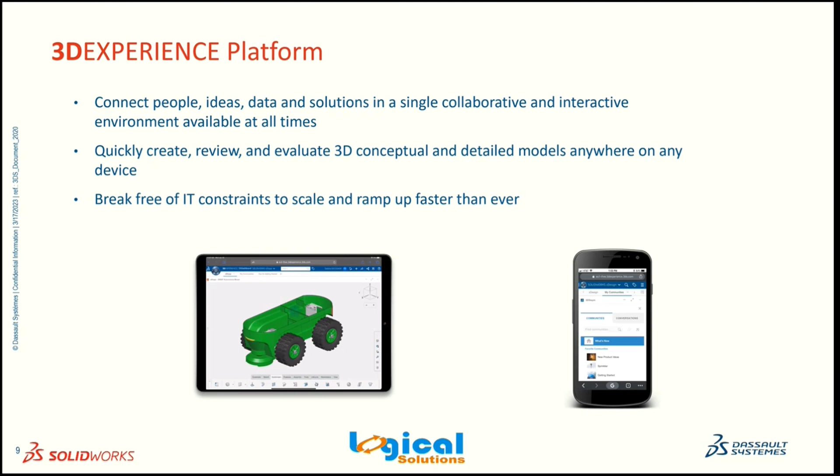Here we are coming with an exciting product, 3D Experience, where we can meet all our requirements within a single platform. People can connect, share their ideas and data, and get solutions within a browser-based platform, and also create 3D models anywhere and review and approve them anytime within the browser, without any other applications installed in your system. Have you ever thought that a simple browser can create 3D models without applications installed in your system?

Okay, let us see how our 3D Experience platform appears and behaves. This is our 3D Experience platform home page. You can see there is a login with the name Vignesh, and we generally call this the compass, where I have placed my cursor.

You can also see there are different roles in this compass, like 3D Creator, 3D Mold Creator, 3D Motion Creator, etc., and there will be apps within these roles. For instance, there is the XDesign app in the 3D Creator role, and the Sheet Metal app in the 3D Sheet Metal Creator role. In the same way, there are many apps across many roles.

We can also create a particular dashboard for our own convenience, for individual purposes or for team discussions, and we can manage the dashboards. Let us create a new dashboard.

I'm entering the dashboard name as 123. Now you can see a new dashboard with the name 123 has been created. Let me drag my apps into that dashboard. You can also see on the top, 3D Experience dashboard, 3D Dashboard 123.

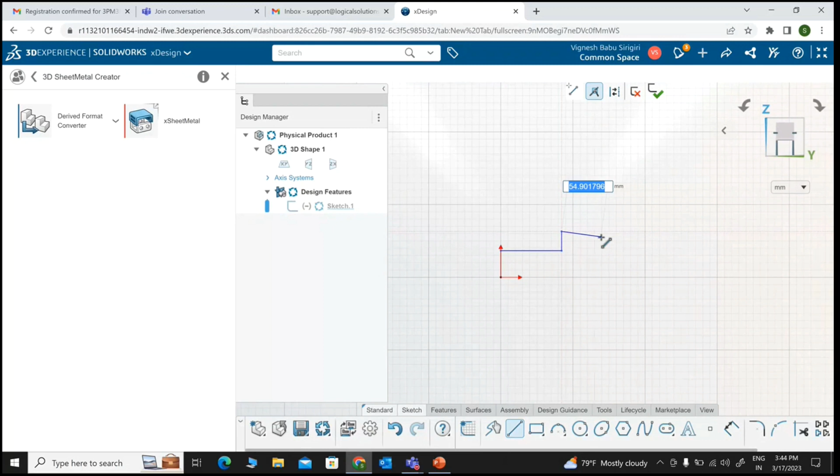Here you can see all the commands. I'm going with the sketch tab and selecting a line here. I'm simply drawing a rough sketch. We can also predefine the dimensions of the sketch, or else you can define that afterwards. Simply I'm drawing a rough sketch, and later on we'll give the dimensions and relations to fully define that sketch.

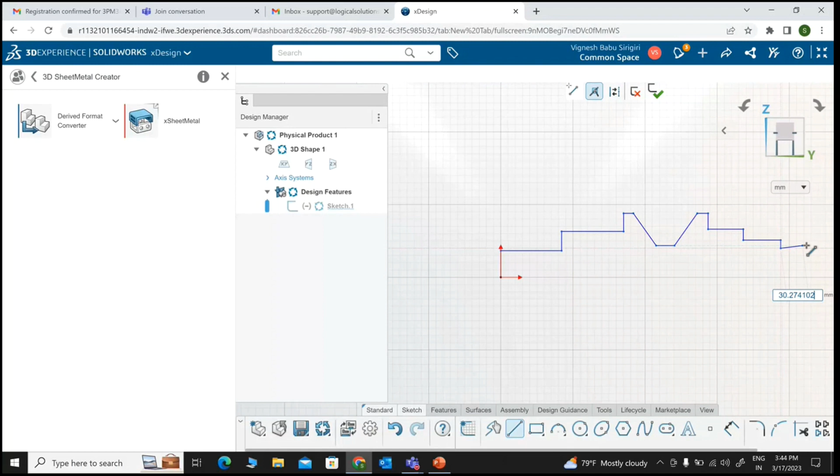Now let me give the dimensions and relations to fully define this one. I will simply give the coincident relation by clicking these two points. This is my first point, and by pressing Control, I am selecting the second point. You can see the relations here, whether it can be horizontal, vertical or coincident. Let me give the coincident relation here, and you can see this line has been constrained, turning from blue color to black color. Whereas in SolidWorks, this is said to be changing the status of the sketch from underdefined to fully defined.

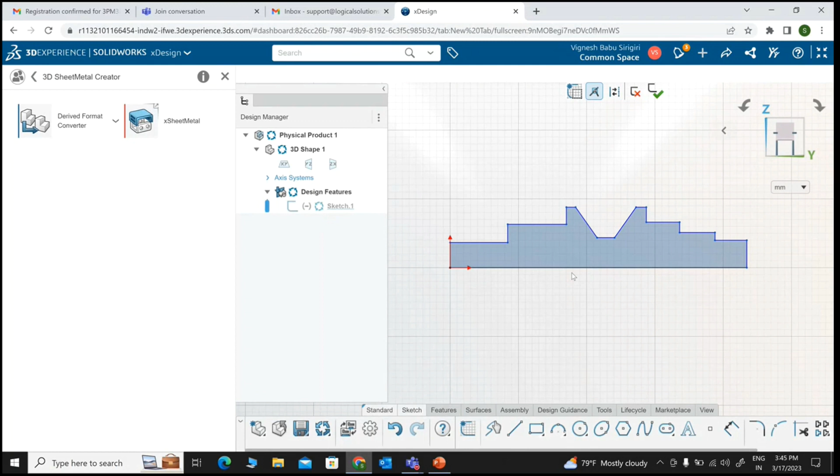So let me make this line as a construction line. And I'll go with the dimensions here, and you can see there is a dimensions command here, sketch dimensions. Let me give the dimensions here. I'll give this line as 60.

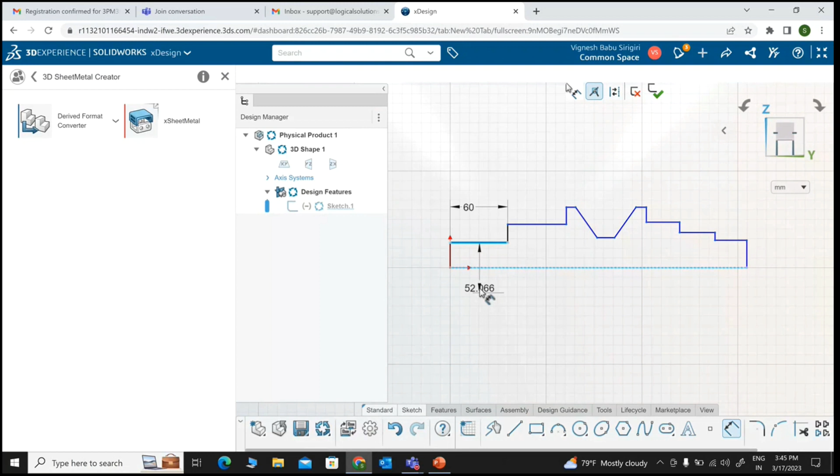Let me define these with the special dimension technique as we do it in SolidWorks: selecting the center line and the line where we are giving the dimension and simply moving the cursor here. This is the special dimension technique we follow in SolidWorks. Let me define this as 40, and this one as 70.

We can also give the relations. You can see I have given this dimension as 15, and I'm selecting this line and this line, and I'm simply giving the relation as equal. Now I'm going to draw a line and make it a construction line, and I'll simply use the symmetric relation between this line and this one with the center line.

I'll go with smart dimension again. Let me give this dimension as 15. From this end point to this point, let me give the dimension as 120. Using the special dimension technique, I will be giving this diameter as 125. In the same way with this point also, with this line also.

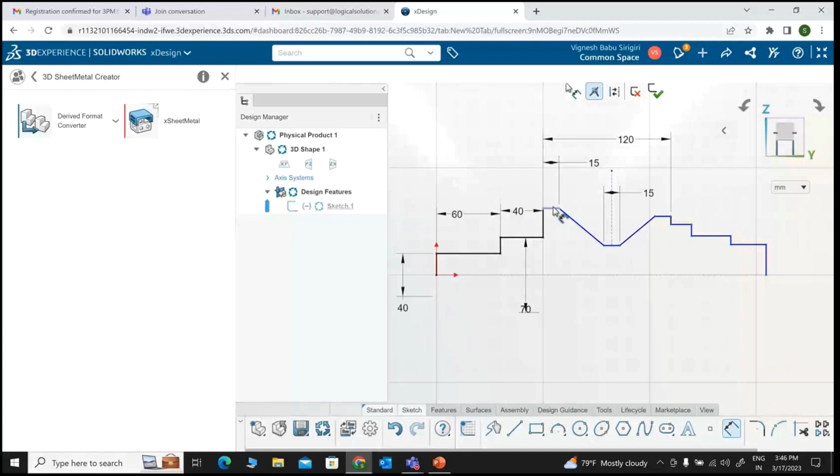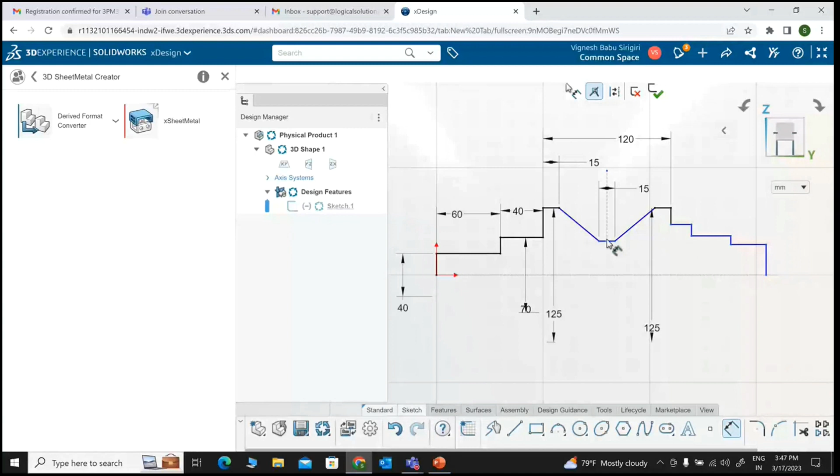Let us give this dimension line as 60 and this thing as 70. I'm simply fully defining the sketch as like we do in SolidWorks.

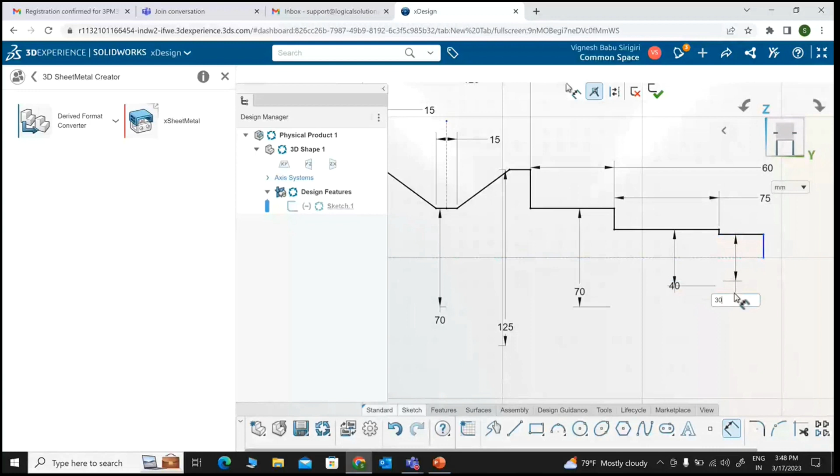This is my last dimension to fully define the sketch. Let me give this as 30, and now I'm going to revolve this one.

I'll go with features. Here we'll be having different features, whether it can be extrude or revolve or sweep or loft, everything. And now I'll go with revolve.

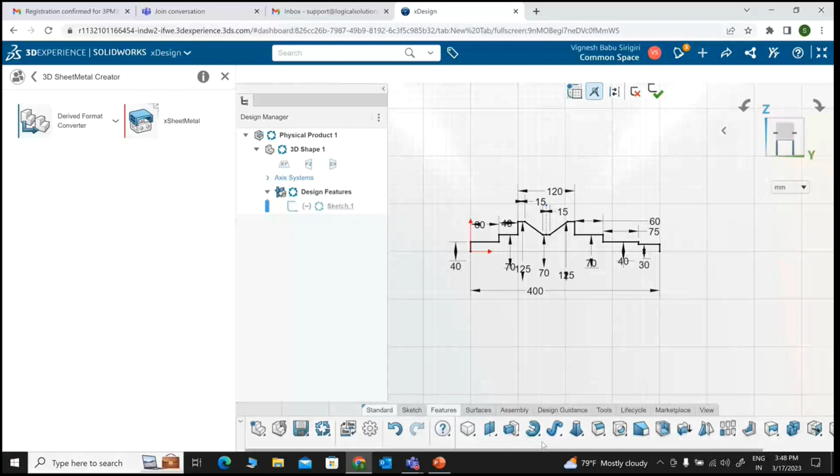A dialog box has appeared here, and it was asking to select whether it can be a solid or a thin feature. The profile of the sketch has already been selected by default.

It was asking to select the revolution axis. Let me select this construction line I made as my axis of revolution, and you can also see the preview there. I'll click on OK.

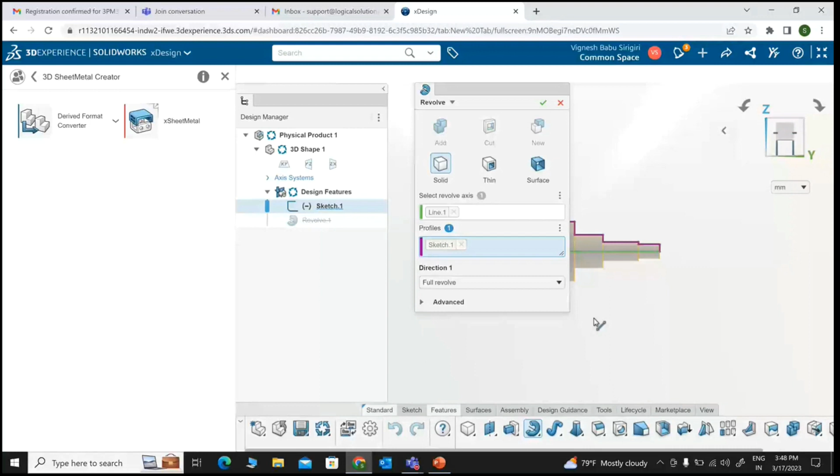You can see my model has been created, and you can also use the shortcut keys Control 1 to Control 7. Control 1 is front view, Control 2 is back view, Control 3 is left view, Control 4 is right view, Control 5 is top view, Control 6 is bottom view, and Control 7 is isometric view. In this way, without any third-party applications installed in your system, within the browser we can create 3D solid models.

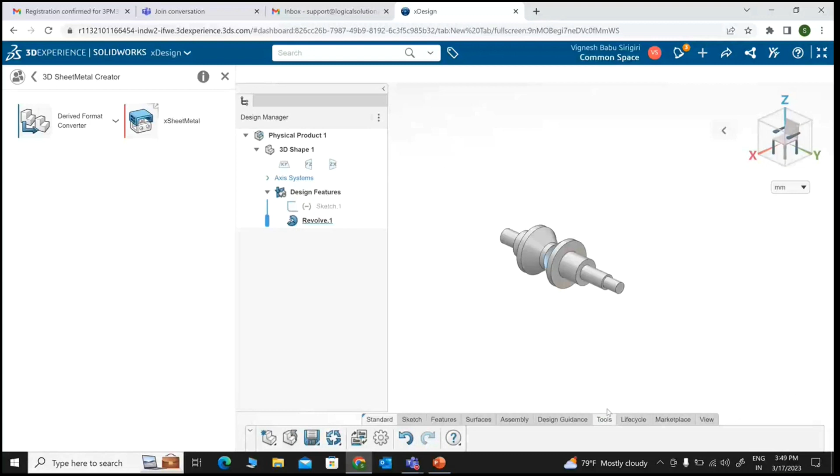We can also change the appearance of these things. In the tools we can see change appearance. It was asking to select the selection type. Let me select the complete set, and I'll select this as the 3D model, and select this red color, apply and continue.

You can see the preview, and the red color has been applied to this model. In this way we can create 3D solid models in the browser-based solution itself.

We can also measure the mass properties here, and we can also measure the distances from here. As in the evaluate tab, we can do everything what we can do in SolidWorks.

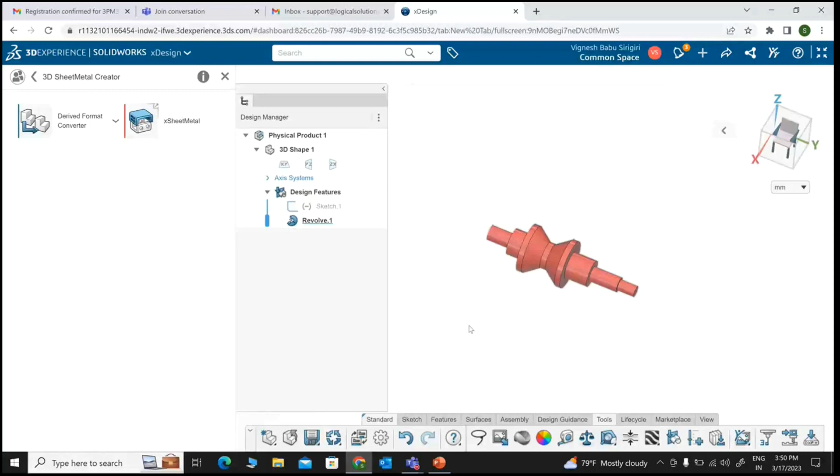Let us see one more application in our agenda, which is X Sheet Metal. The 3D sheet metal creator provides a focused user experience tailored to the needs of sheet metal designers and engineers who need to design sheet metal components and enclosures. We can create accurate and detailed sheet metal designs that are ready for manufacturing anywhere, anytime, with no installation necessary.

We can also validate designs early on, with instant access to automatically updated flat patterns. Along with this, the 3D sheet metal creator streamlines the design process with an intuitive, intelligent and dedicated sheet metal user experience, and also automates repetitive tasks with the help of design assistants using machine learning technology.

Let us see in brief the 3D sheet metal creator on the 3D experience. You can see here, as like the X Design app, the X Sheet Metal app has been fixed here in this dashboard.

In the same way, here also we'll be having how to create a new component, how we can open an existing component, and everything.

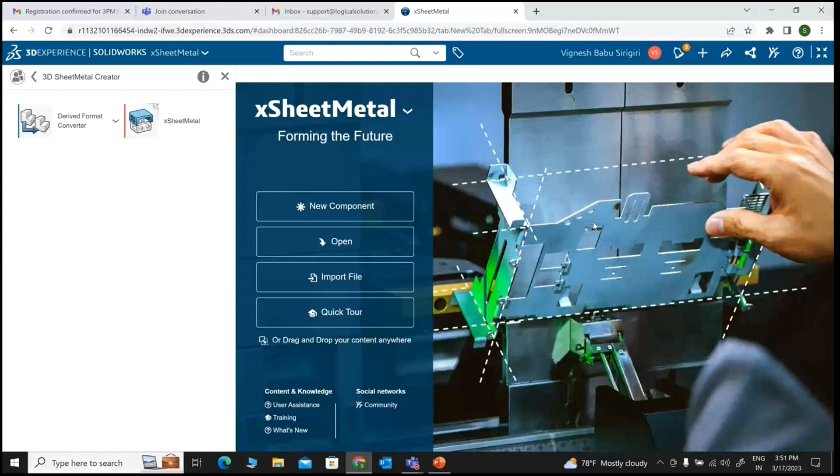Let me go with the new component and let us create a small design here. As in SolidWorks, we will be having 3 planes here: XY plane, YZ plane and ZX plane. To hide these planes, you can simply click on this and click hide. Let me hide all 3 planes.

Let me draw a sketch on this XY plane. I'll simply click on that XY plane and click on sketch. You can see it has become normal to my screen.

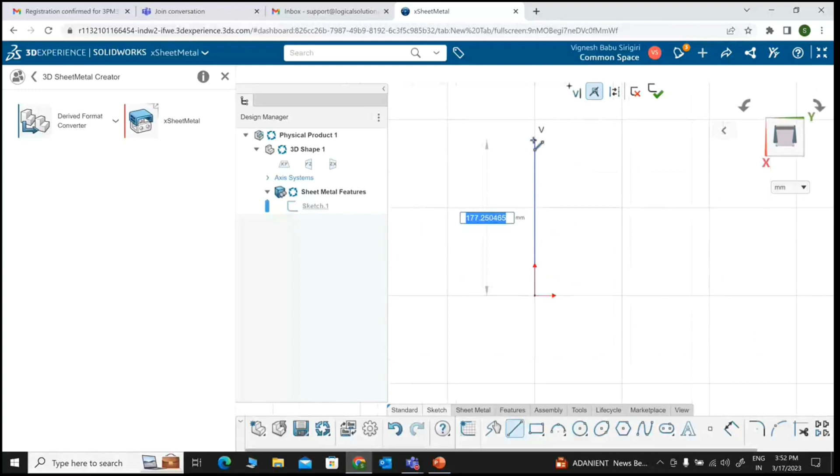Let me select a line and draw my sketch for this sheet metal. As you know, in SolidWorks, while operating with the line, if we place the cursor on the starting point of that line, it will be turned into an arc. In the same way, we can see here also. The line has been turned into an arc.

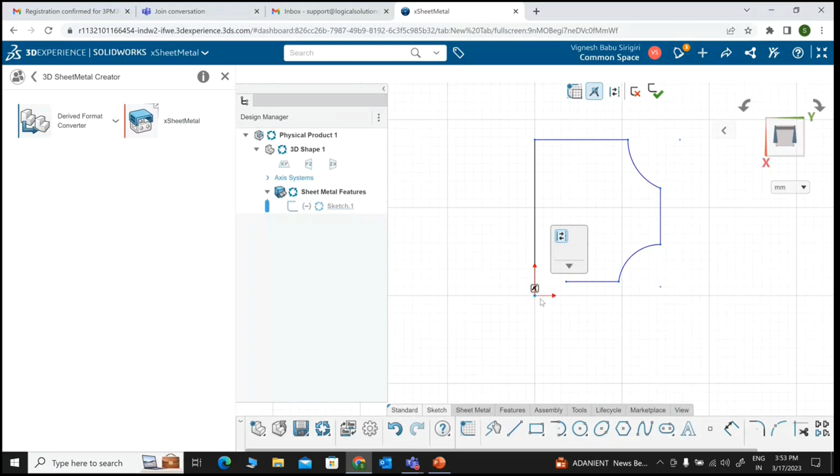Using the dimensions and relations, let me fully define the sketch. Coincident. And using these dimensions, from this point to this point, let us give this as 70. Let me give this as 105.

This as 50. This as 40.

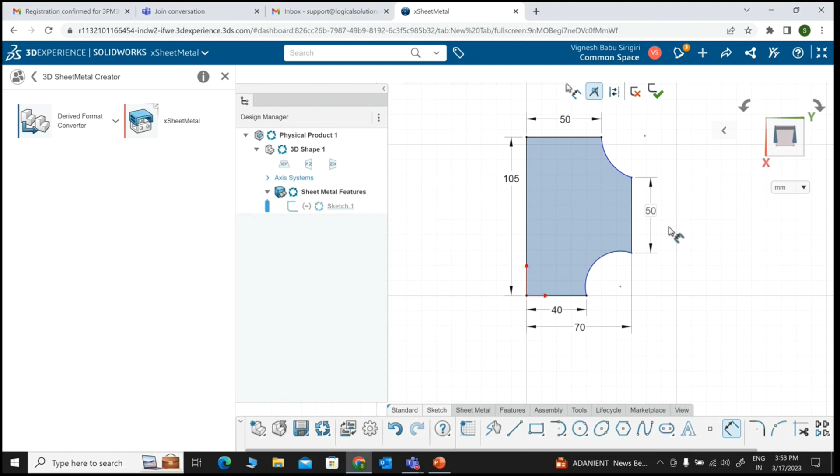Let me give the radius of these 2 arcs. Let me give this one as 25 and this one as 37.5. And also fully define this one. You can see here this has been fully defined.

We can also give the sketch fillets here using the sketch fillet option. You can see there is a sketch fillet option, and we can select here, simply select here, and let me give the dimension as 5 mm. Sketch fillet is applied here and here and here.

You can see the sketch has been fully defined, and the sketch fillets have also been applied here. You can see the extra sheet metal tab in this. Simply click on the sheet metal. You can see here, as like base flange, we will be having an option called wall. Let me click on this wall.

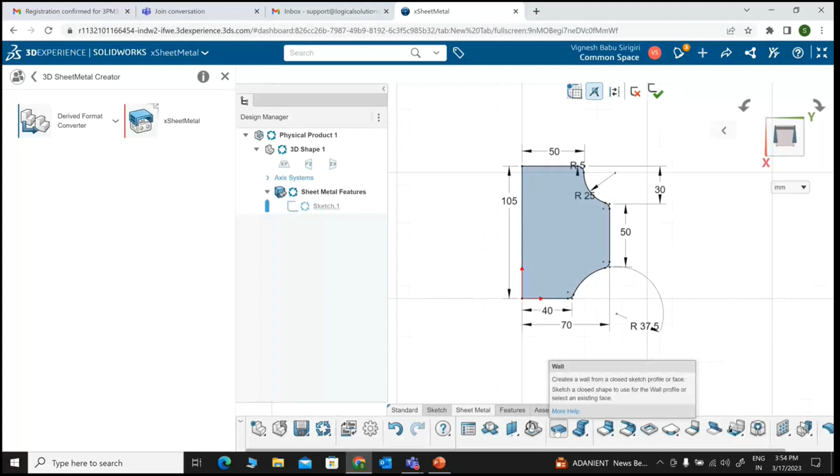You can see here the sheet metal parameters, how much the thickness should be and how much the bend radius should be. I'm going with the default one. And you can see here the profile has been automatically selected, and it was asking for an option offset and everything. I'll go with OK.

I'll click on Control 7. You can see here the base flange, or else the wall, has been applied for this given sketch.

As like in SolidWorks, if you want to know about a command, you can simply place the cursor on that command so that a small preview of that command will appear there.

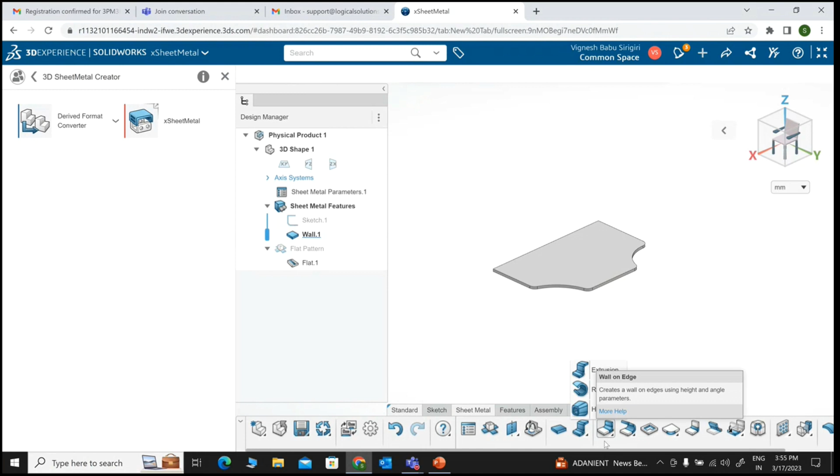Let us go with this edge flange, that is wall on edge. I'll simply click on wall on edge.

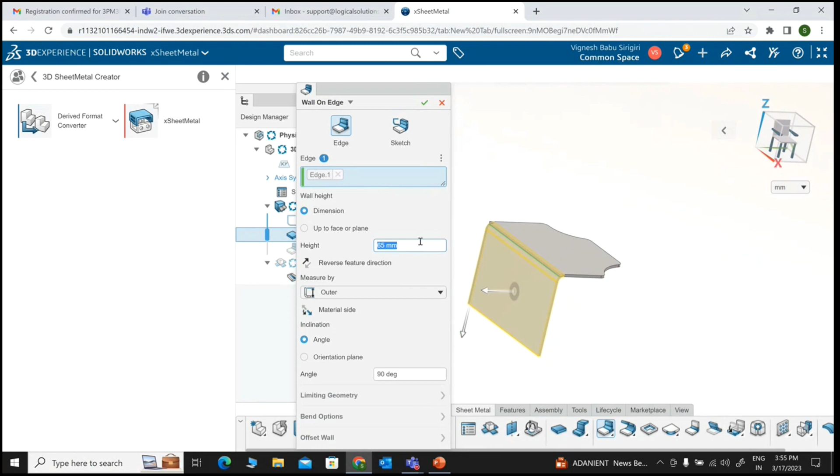Let me select the edge here, going with this edge. The material has been applied in the downward direction and the height is also given as 100 mm. Let me change this to 65 or 70 and reverse the direction here and click on OK. You can see here the edge flange has been formed here.

And in the same way, let us go with the miter flange. I'll simply click on this face and draw a sketch on this face, and I'll go with the line.

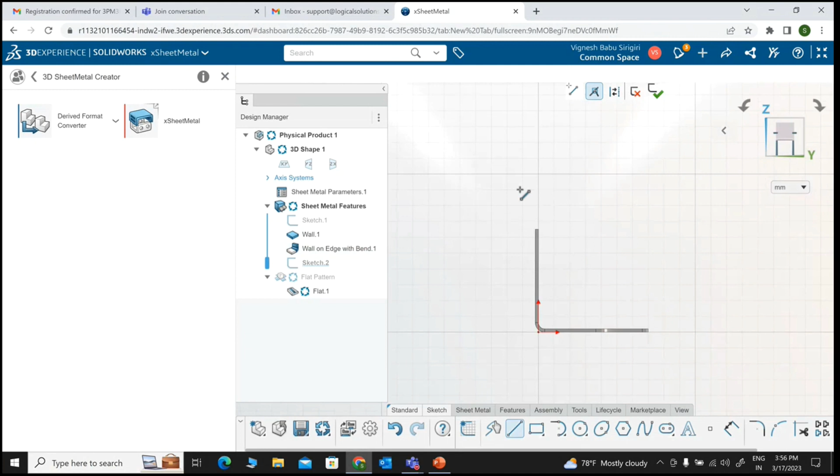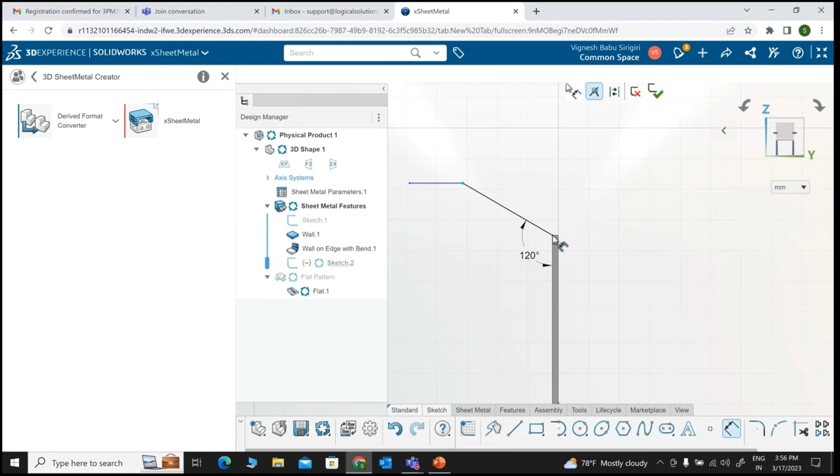Let me fully define this one also, the dimensions. Let me give the angle as 120, and the distance between this point and this point is around 40. Give this distance as 50.

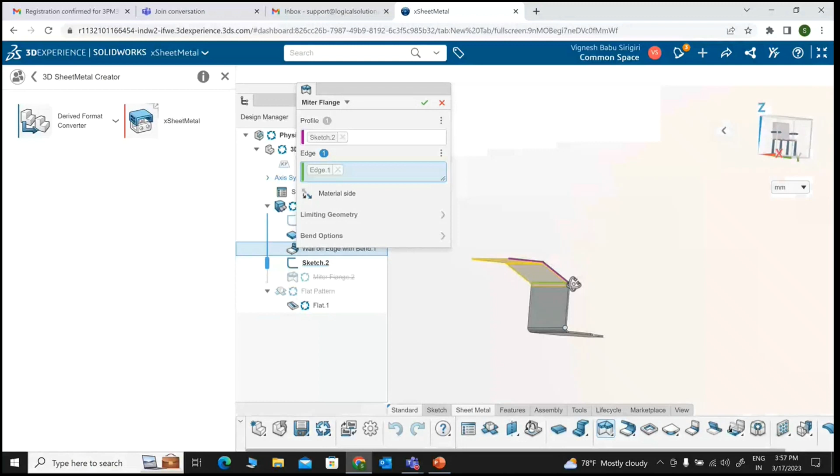I'll move on to the sheet metal tab, and I'll go with this miter flange, and I'll simply select this profile. The edge has been automatically selected, and you can see here the miter flange has been formed.

Also, we can use the flat pattern here to flatten the sheet. You can see here the option switch to flat pattern. After clicking on switch to flat pattern, it has automatically shifted to flat pattern.

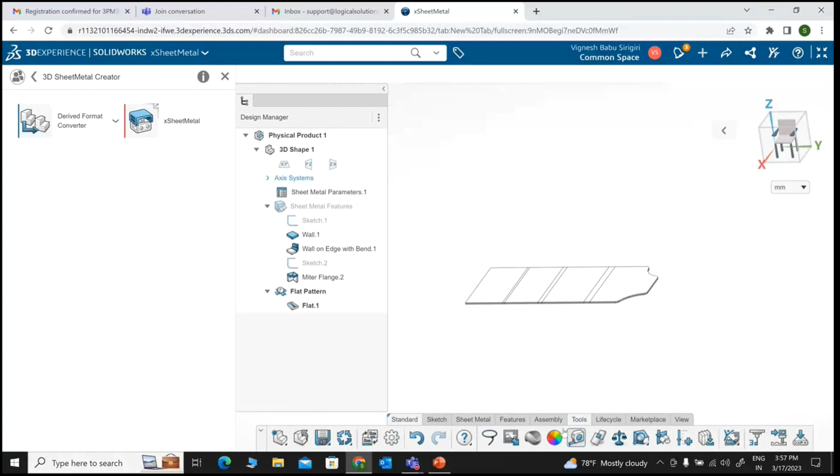We can also measure the distance using the tools. Here we'll be having the tools tab, and we can see how to measure. By clicking on the measure, a dialog box appears, and I'm selecting faces from one edge to another, from one face to another face. You can see here the distance is around 227.907 mm.

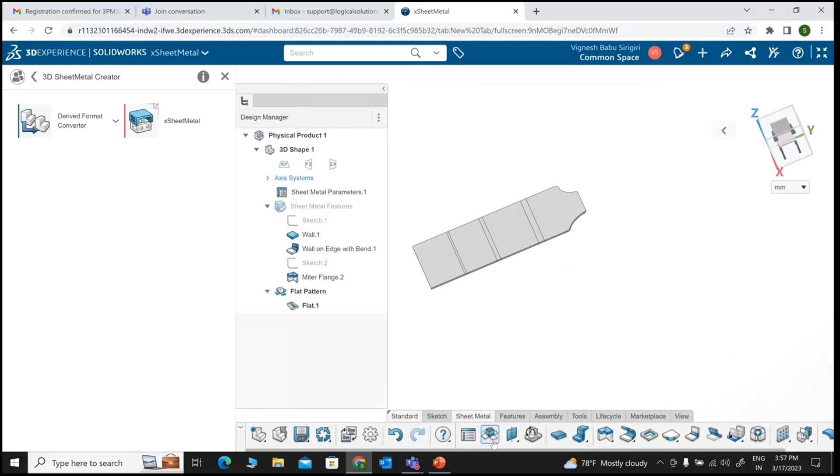In this way we can also go with these flat patterns. And if you want to unfold the sheet or fold the sheet, go with the sheet metal tab and click on this flatten tab, and it will come to the automatic state.

We can also use the keyboard shortcuts Control 1 to 7, as like in the XDesign app. And we can also use the rollback bar here.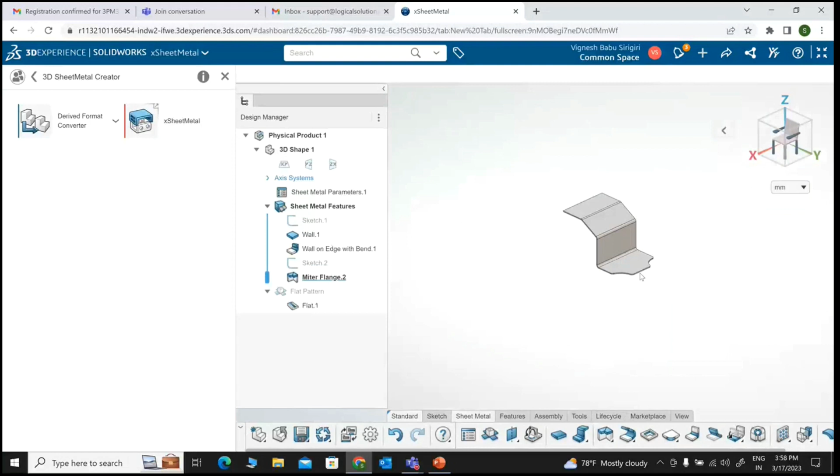If you want to verify the part in a step-by-step procedure, we can also verify in this way using this rollback bar. Simply click on this and drag downwards, and you can see a step-by-step procedure, reviewing the part. This is all about X sheet metal.

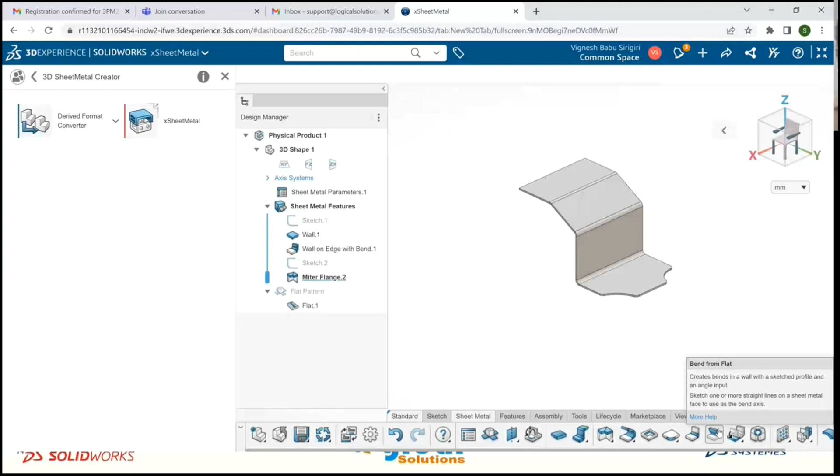Apart from these, XDesign and X sheet metal, there are a number of apps in our 3D experience, and we can also see here, apart from these things, we will be having different roles and different apps.

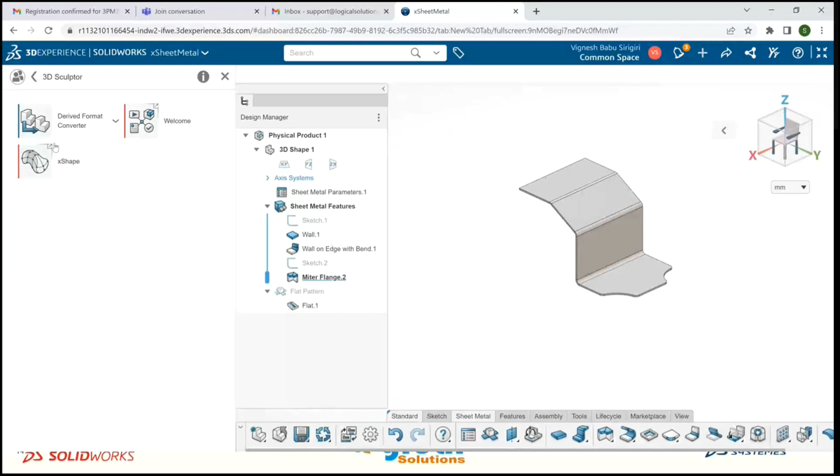These are the different roles, and you can see here there is 3D Render, and we are having X Studio in this. And here we can see 3D Sculptor, where we can find the X Shape app. Without any third-party applications, we can simply create 3D models within the browser, and this is the complete browser-based solution.

And we can also add markups, and we can also communicate among ourselves using the 3DSwym communities. And we can also approve them, and we can also track the status of these things.

And we don't require any kind of hardware machine to be purchased, and it is ready to use in whatever condition the system is in. All we need is an internet connection and a browser, and we don't need to upgrade each and every time whenever required.

Software will automatically get updated, and no need to migrate the data. We'll be having the safest cloud platform to save your data, where we can access it anytime on any device.

There will be complete security for your data, and we can also recover the data using the backup. In this way, in many ways, the 3DEXPERIENCE platform will help us in creating all these things which are useful for our mechanical and automobile industries.